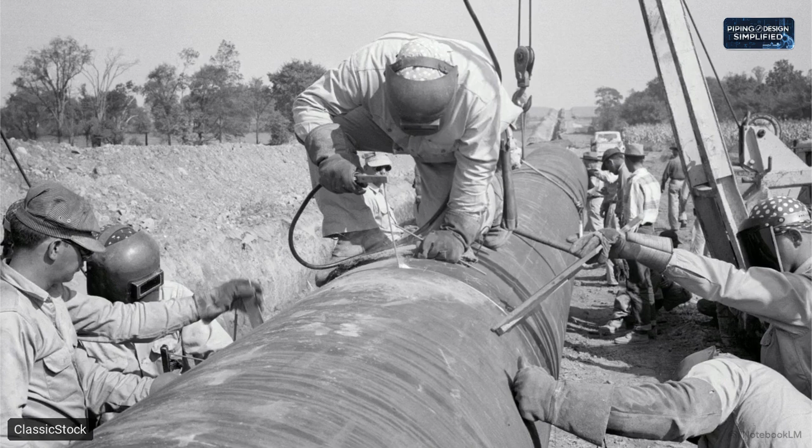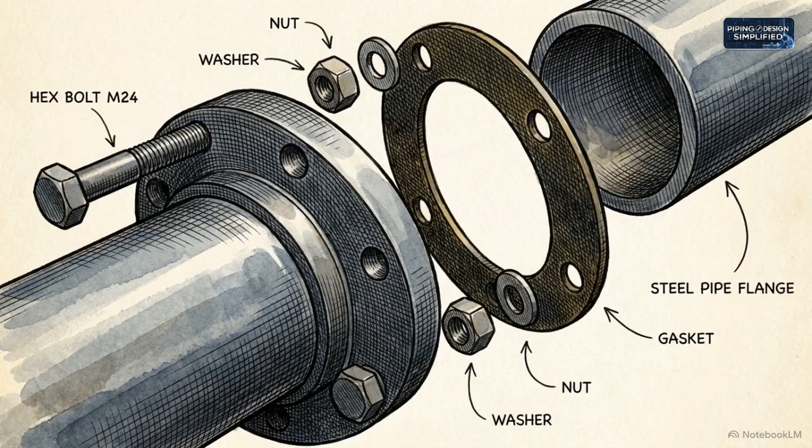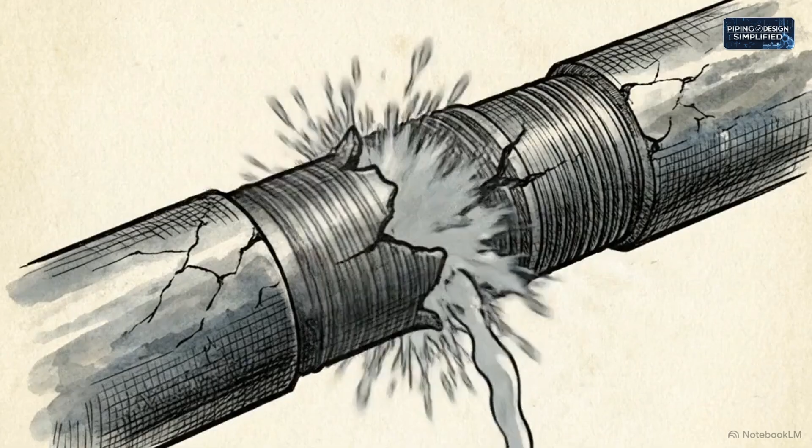When you're dealing with high-pressure piping, the miles of thick, hardened steel aren't usually what keep you up at night. The true test of your system's reliability almost always comes down to the smallest components, the joints. A mechanical breach in an industrial line triggers immediate pressure loss, hazardous material spills, and forced plant shutdowns.

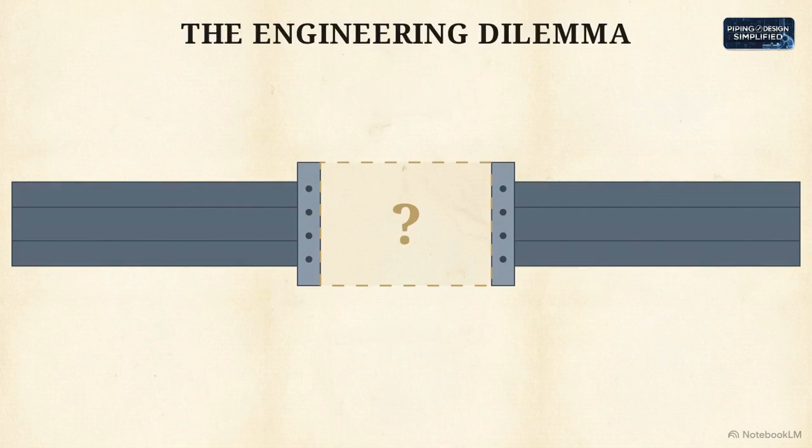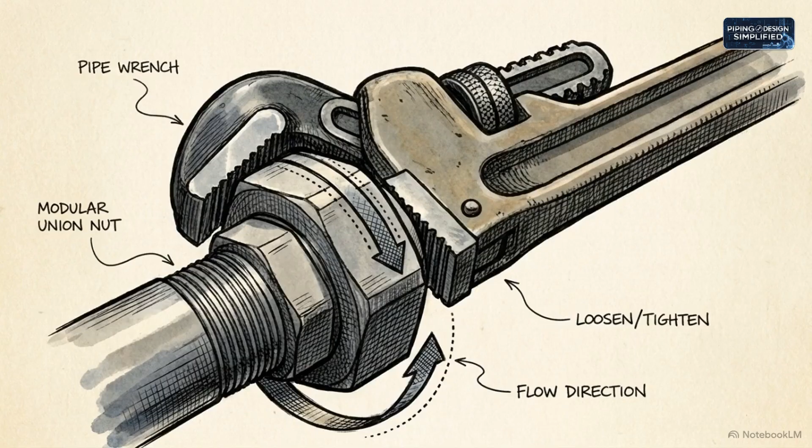That brings us to the core engineering dilemma of connecting any two pipes. You have to choose between locking them together permanently to handle maximum stress, or building in a way to easily open the line for future maintenance. To navigate this trade-off, we are going to look closely at three specific connectors: couplings, unions, and nipples.

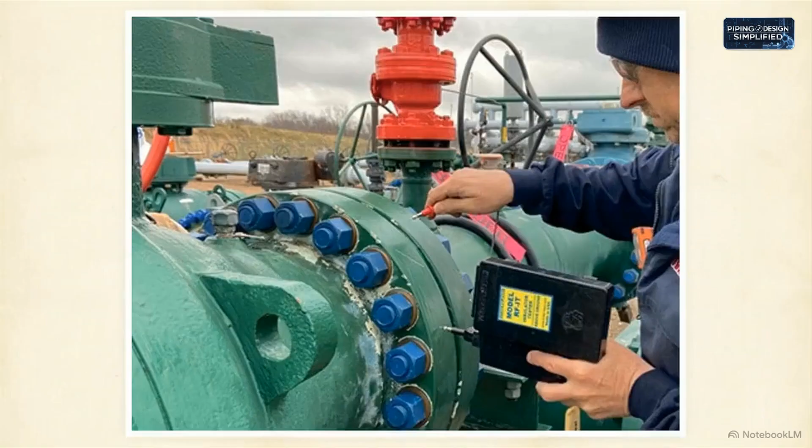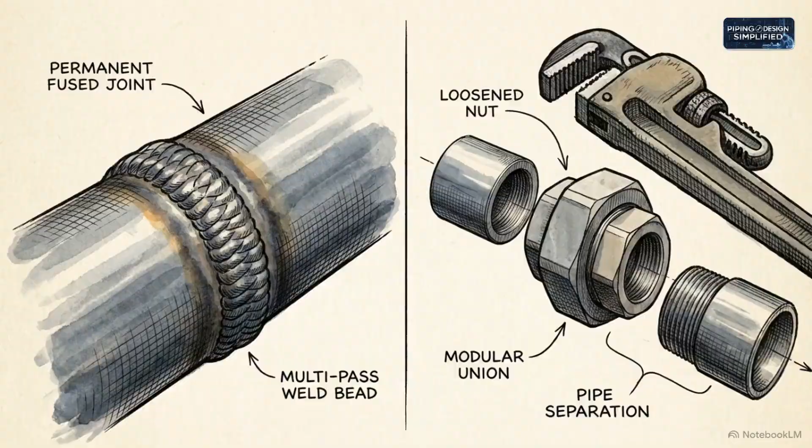Selecting a fitting involves matching the physical shape to specific pressure classes, volatile chemical environments, and the realities of a long-term maintenance schedule. Balancing the need for permanence against the need for accessibility is the defining difference between building a resilient system and actively engineering a future leak.

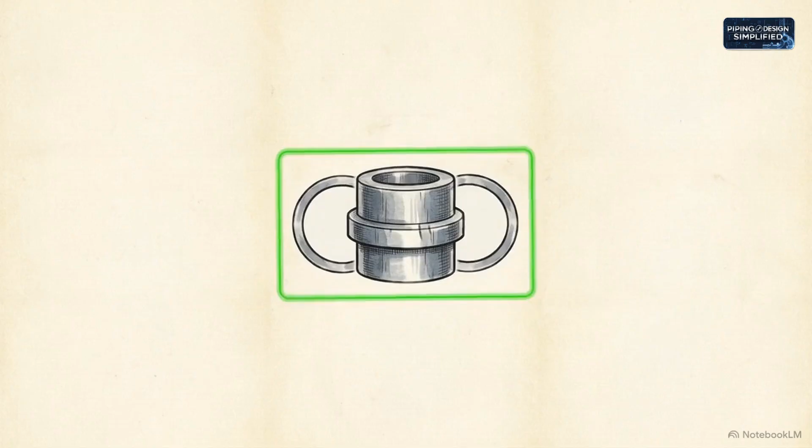Let's start with the coupling. This is the primary choice for a permanent line extension. Whether it's a full or half coupling, threaded or socket welded, it joins two pipes by creating a continuous, streamlined cylinder. That low-profile design maximizes the joint's structural integrity.

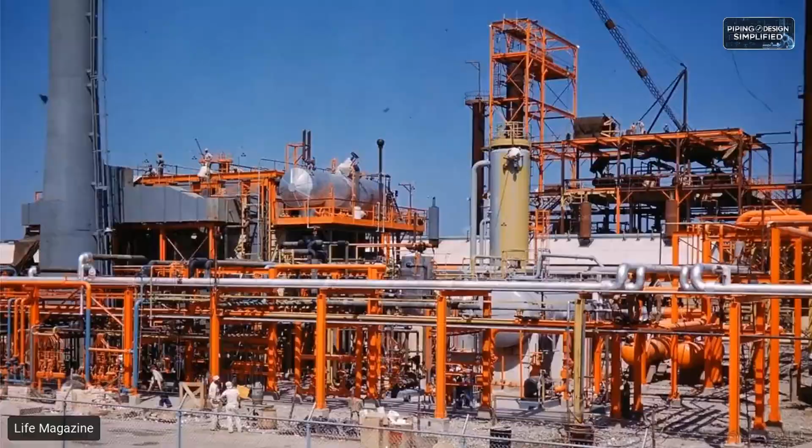The major trade-off here is total permanence. Once a coupling is fully installed, especially if it's welded, you cannot take that joint apart. Disassembly requires physically cutting the pipe. You use couplings for long horizontal runs of water or gas lines across a facility, areas where you never expect to open the system back up.

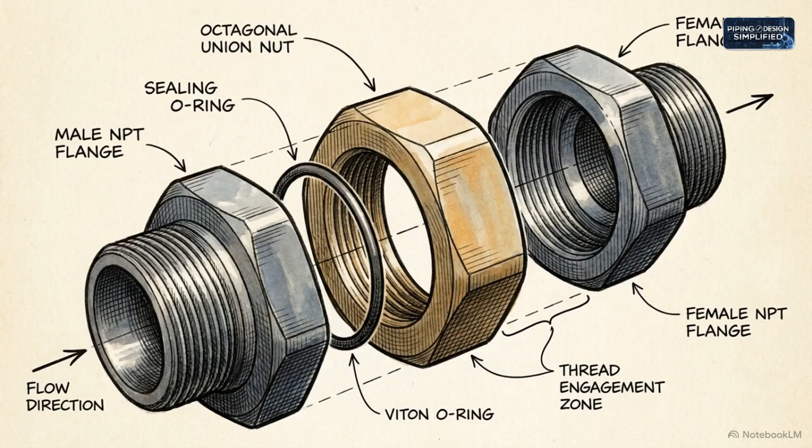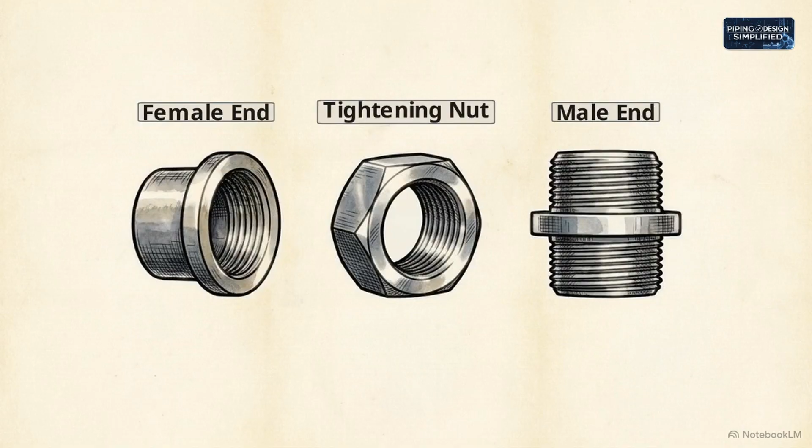If you do need to get back into the system, you use a union. Think of this fitting as your maintenance gateway. A union uses a three-part design: a male end, a female end, and a tightening nut. This allows a technician to easily decouple and reconnect the pipe later using nothing but a wrench.

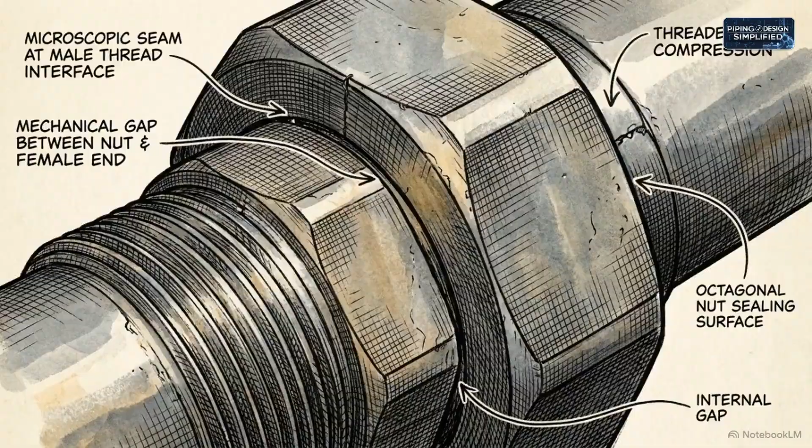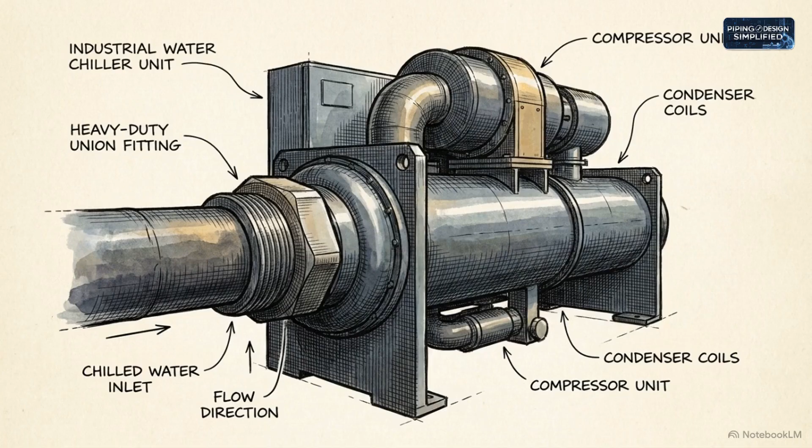However, that modularity comes at a cost. A union is bulkier and introduces multiple potential leak points where those three pieces meet. Because of this, they are generally restricted to lower pressure, small bore systems. You'll find unions placed immediately adjacent to pumps, chillers, or filters, components that have to be routinely pulled offline and replaced.

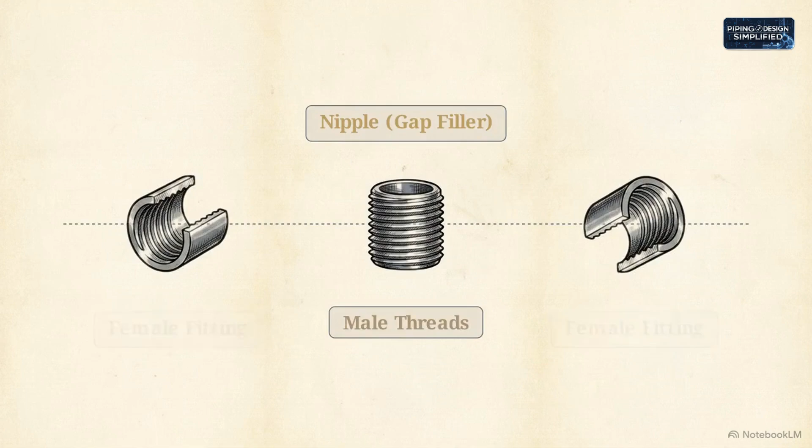Finally, we have the nipple. This is essentially a structural gap filler, a short length of pipe with male threads on both ends, used to connect two female fittings over very short distances.

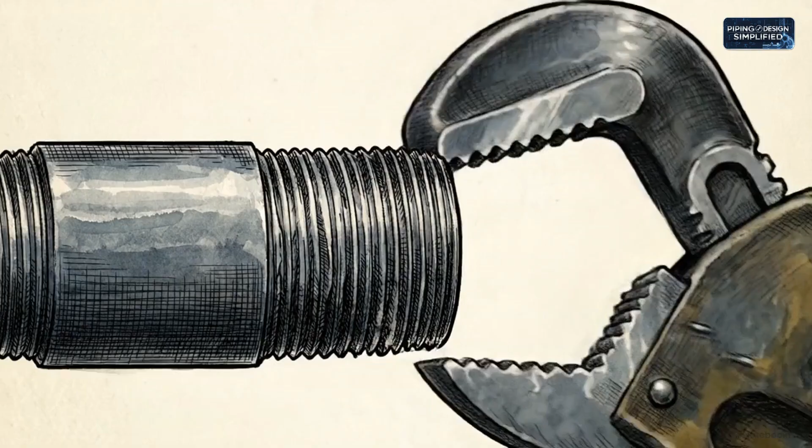You have to be incredibly careful with close nipples. Because they are threaded end-to-end with zero bare pipe in the middle, there is nowhere to grip them with a wrench. Extracting a close nipple later often means destroying the threads entirely.

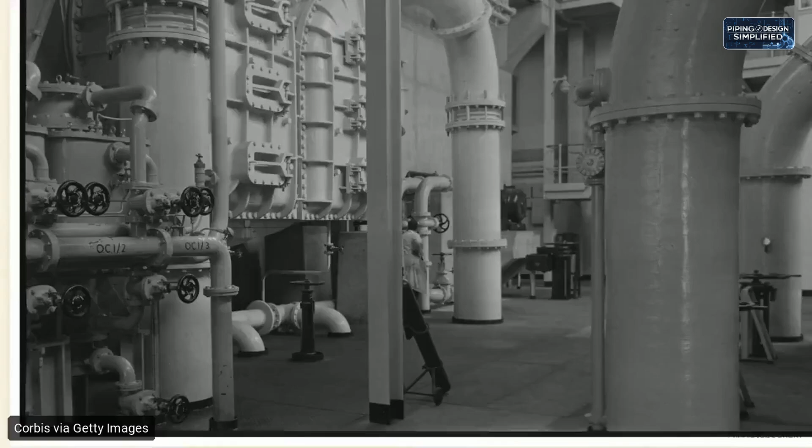Picking between a coupling, union, or nipple is a direct commitment to exactly how you plan to maintain that specific foot of pipe for the next 20 years. But the physical shape of the fitting won't matter if it can't withstand the internal system stress.

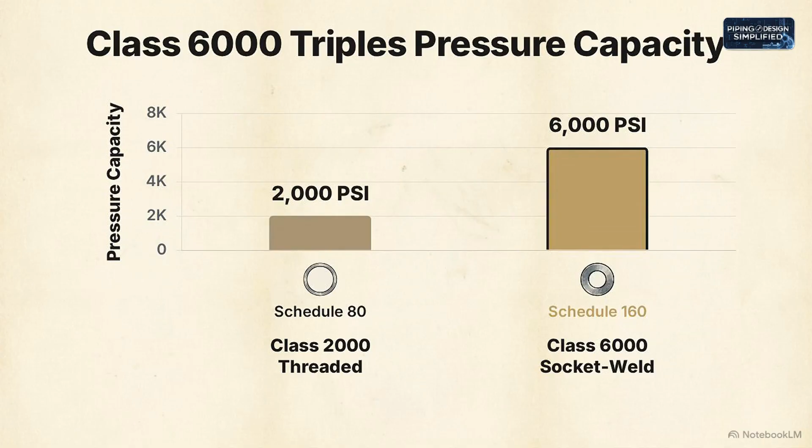This chart shows the specific pressure capacities of forged fittings, mapping a Class 2000 threaded fitting against a Class 6000 socket weld fitting, along with their required pipe schedules. Specifying a Class 6000 socket weld fitting guarantees structural safety under extreme, high-vibration industrial pressures. But that durability demands much thicker Schedule 160 pipe to match. It also requires specialized welding labor, rigorous weld inspections, and massive material costs.

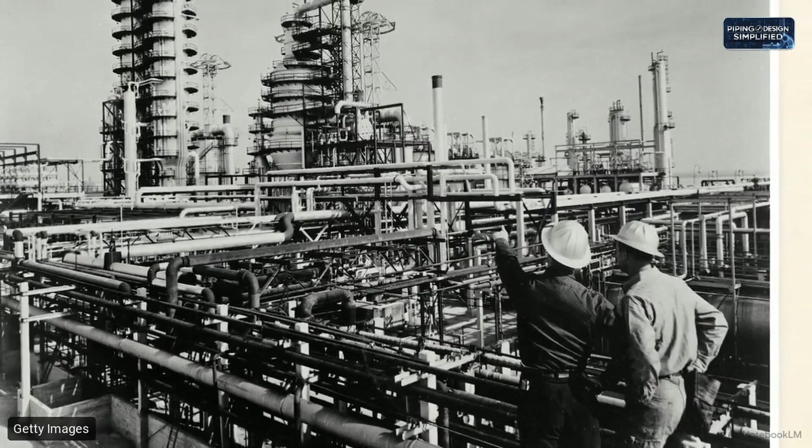On the other end of the spectrum, Class 2000 threaded fittings bypass those hurdles. They are highly efficient and cost-effective for standard, low-pressure fluid transport. Over-engineering your pressure class burns through your project budget, while under-engineering invites immediate structural failure the second the system comes online. Even a Class 6000 pressure rating is useless if you pump the wrong fluid through the line.

If the material dissolves from the inside out, the joint will fail regardless of its thickness. This chemical resistance scorecard maps standard PVC and CPVC against exotic plastics like PVDF across three specific chemical groups: aliphatic solvents, strong acids, and esters.

Look at the PVDF column. It earns an excellent rating for resisting strong acids, halogens, and aliphatic solvents. If you are operating in a severe chemical environment, that resistance easily justifies its premium cost. PVC, on the other hand, is perfectly sufficient for weak acids and salts, but if it is exposed to aromatic solvents, it suffers a complete failure rate.

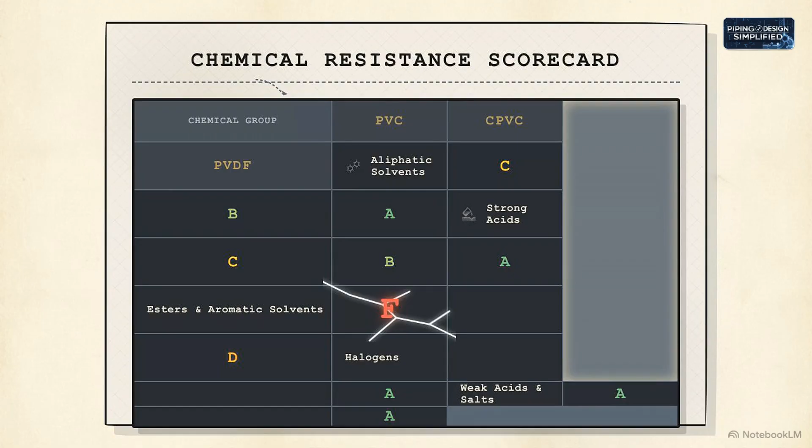Once you have the right fitting, the right pressure class, and the right material, the final step is actually installing it, specifically sealing the threads to prevent fugitive emissions.

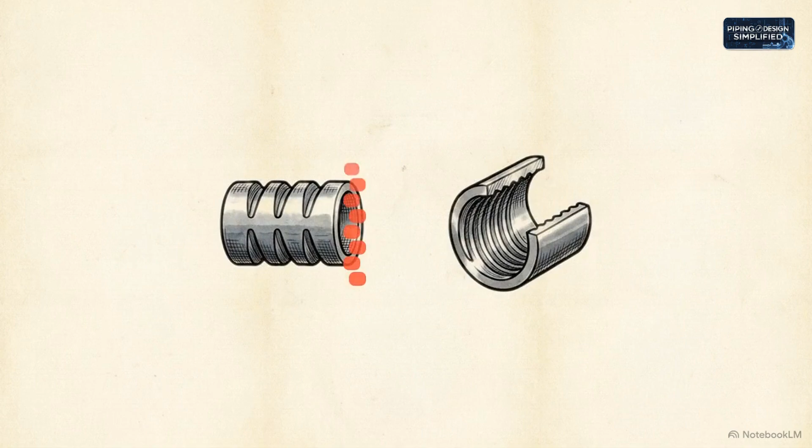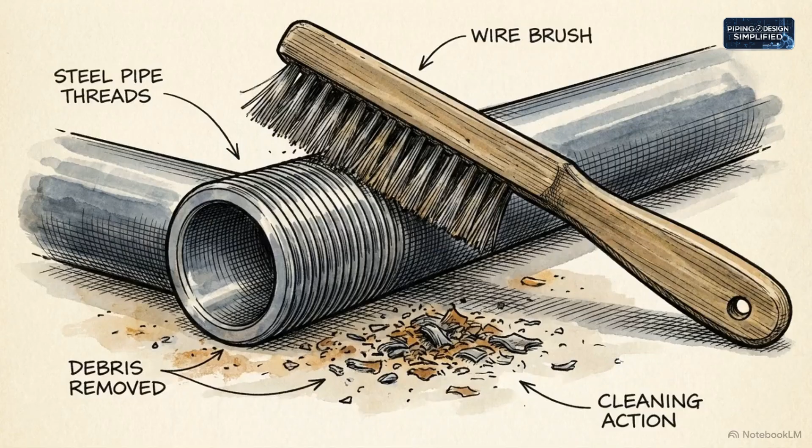A reliable seal isn't a guessing game. It requires applying an anaerobic pipe thread sealant to the male end and tightening the joint to guarantee 5 to 6 full threads of mechanical engagement. That premium sealing method requires perfectly clean threads, precise torque tools to avoid over-tightening, and a full 24-hour cure time before safely pressurizing the line.

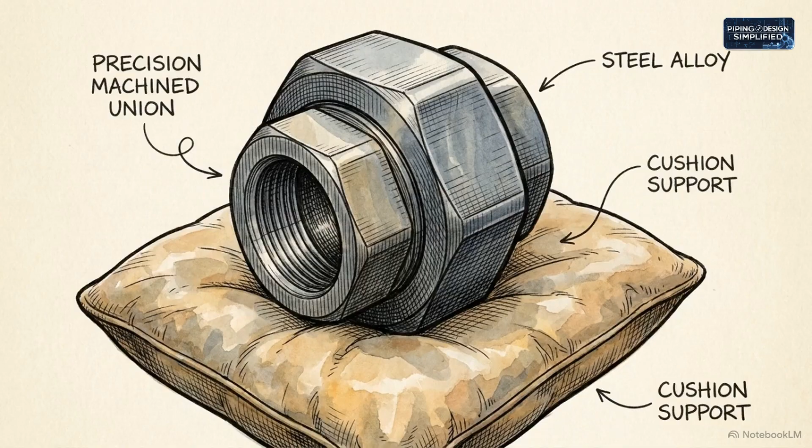It is much slower than a quick wrap of Teflon tape and pipe dope. When a joint leaks, it is rarely a defect in how the fitting was manufactured. It is almost always a failure of the material specification or the installation technique.

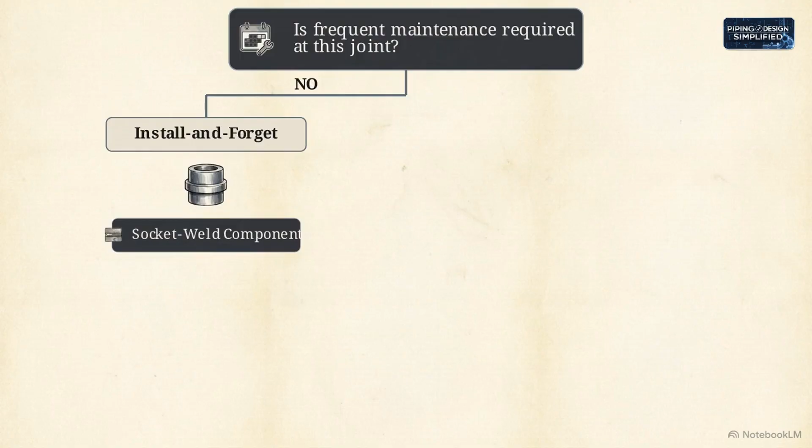This decision tree shows how to navigate all these variables, starting with the ultimate determining question: is frequent maintenance required at this specific joint? If the answer is no, you go down the install and forget path. For miles of uninterrupted oil, gas, or chemical pipelines, you specify socket weld couplings to maximize permanent structural strength.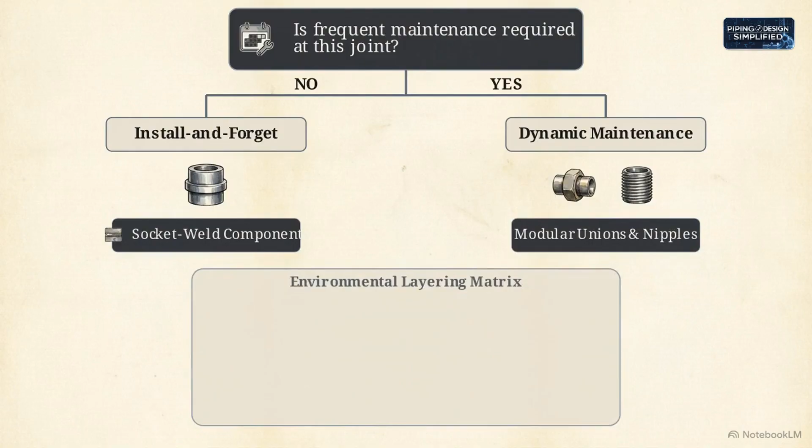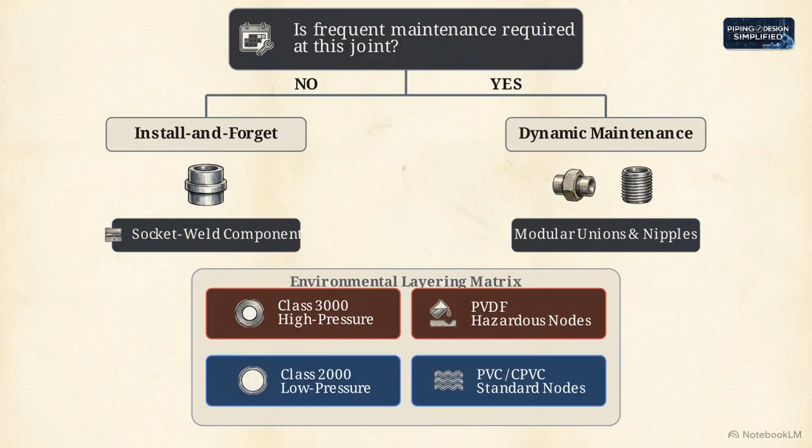If the answer is yes, you take the dynamic maintenance path. For chillers, HVAC units, or chemical feed pumps that need annual replacement, you specify unions and nipples to create modular, easily removable zones. Then you layer the pressure and chemistry choices onto those paths. You allocate Class 3000 or exotic plastics like PVDF to the hazardous, high-pressure nodes, and use Class 2000 or standard PVC for the low-pressure nodes.

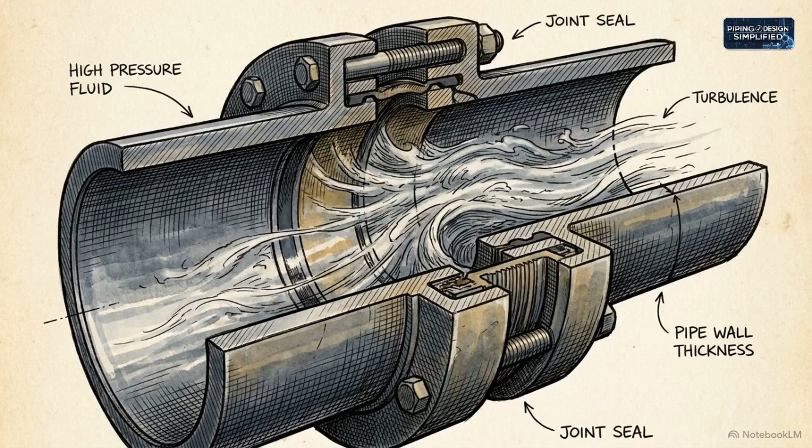Successfully joining a pipe demands technical alignment well beyond simply matching the inner diameter. True system engineering means matching the fitting's exact pressure class to the physical load, the material composition to the chemical fluid, and the connection type to the facility's maintenance schedule. Ultimately, mastering the strategic trade-off between permanence and accessibility defines the long-term survival of the entire industrial infrastructure.